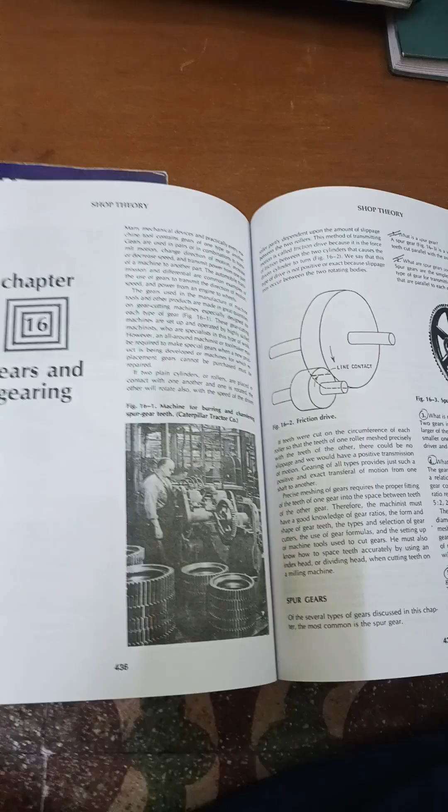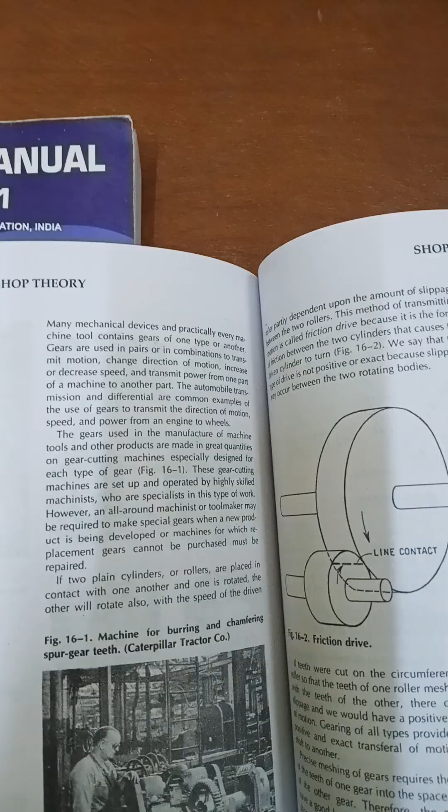Many mechanical devices and practically every machine's tools contain gears of one type or another. Gears are used in pairs or in combinations to transmit motions, change direction of motion, increase or decrease speed, and transmit power from one part of a machine to another part.

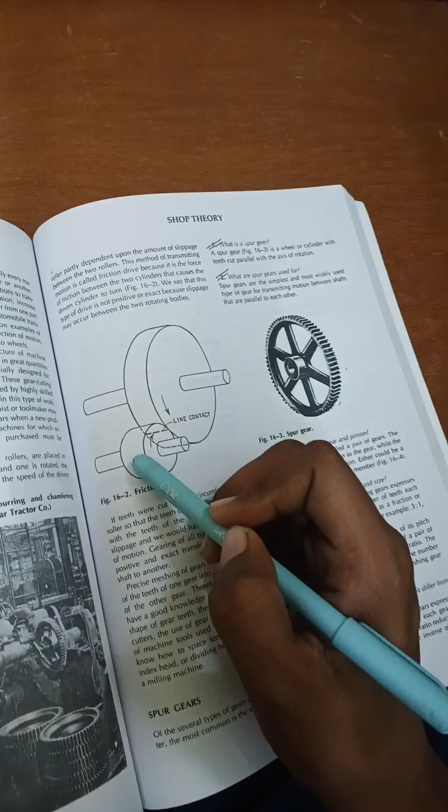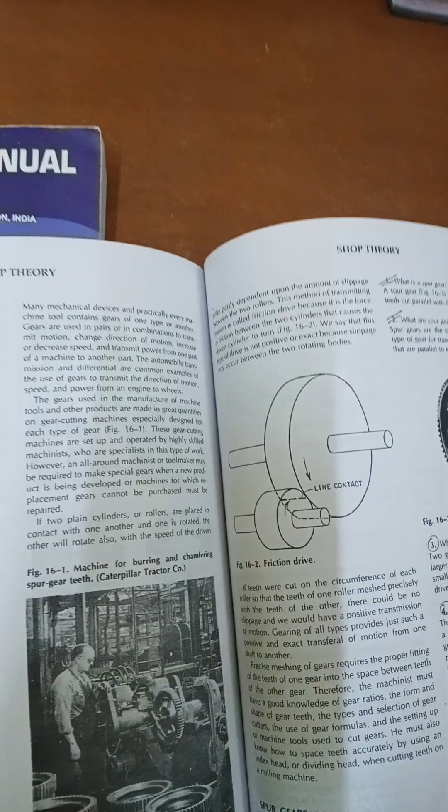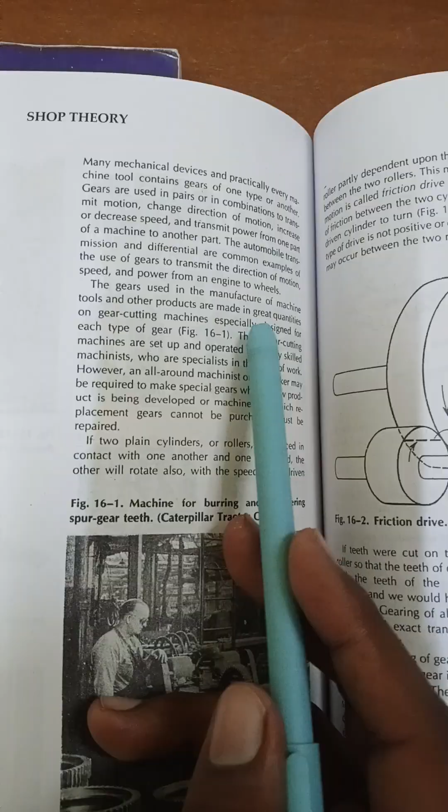The automobile transmissions and differential are common examples of the use of gear to transmit direction of motion, speed, and power from an engine to wheels. The gears used in the manufacture of machines, tools, and other products are made in great quantities on gear cutting machines specially designed for each type of gear. Figure 16-1, that is the gear.

These gear cutting machines are set up and operated by highly skilled machinists who are specialists in this type of work.

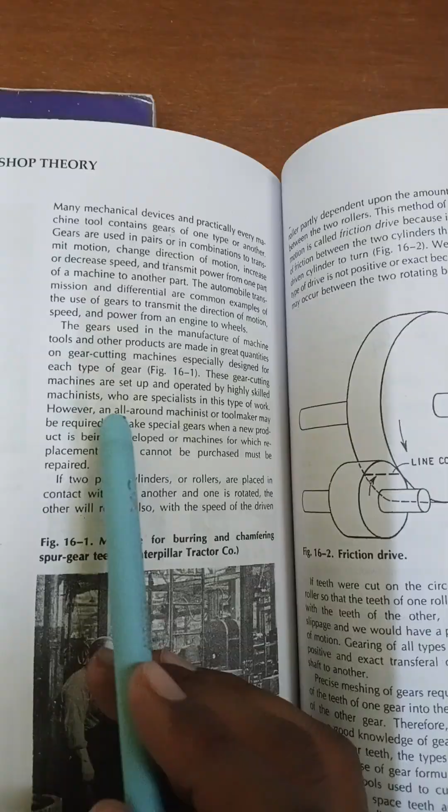However, an all-round machinist or tool maker may be required to make a special gear when a new product is being developed or machines for which replacement gear cannot be purchased must be repaired.

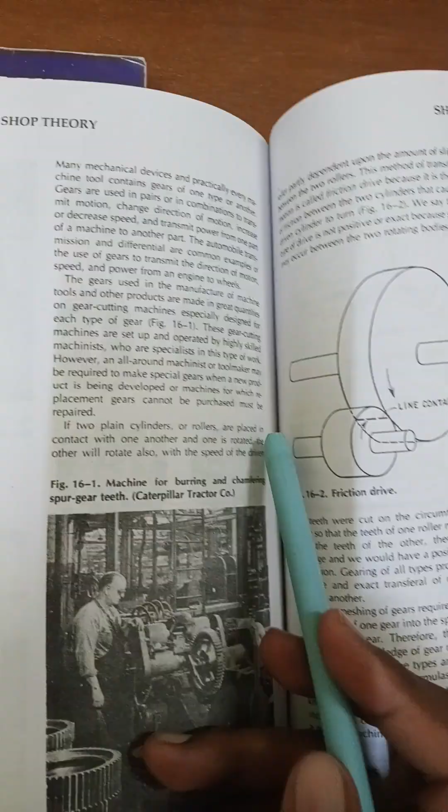Roller partly dependent upon the amount of slippage between the two rollers.

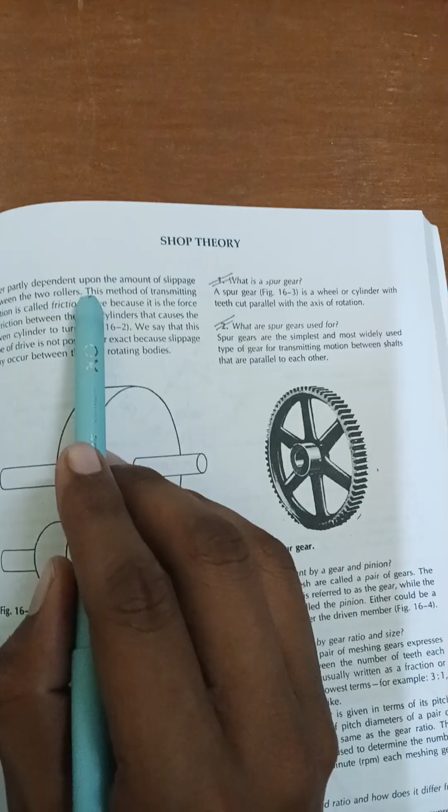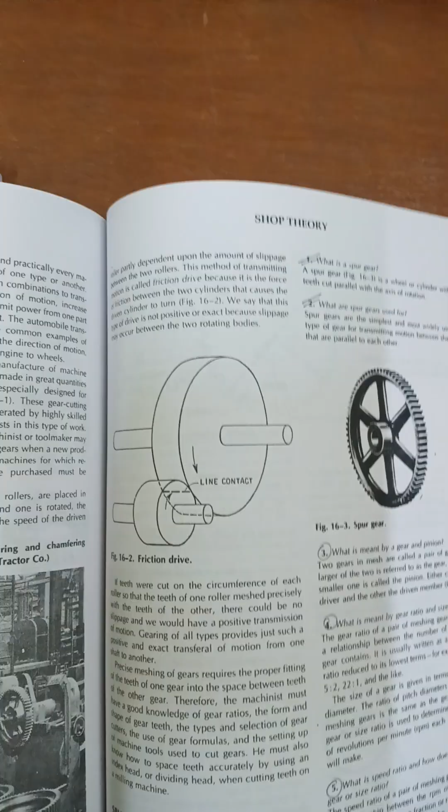Drive, because it is the force of friction between two cylinders that causes the driven cylinder to turn. 16.2. We say that this type of drive is not positive or exact because slippage may occur between the two rotating bodies.

The first in gears is the spur gear. What is spur gear? A spur gear is a wheel or cylinder with teeth cut parallel with the axis of rotation.

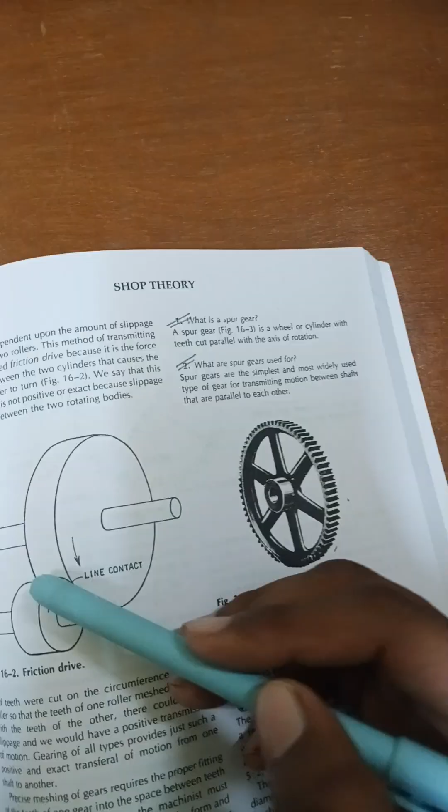What are spur gears used for? Spur gears are the simplest and most widely used type of gear for transmitting motion between shafts that are parallel to each other.

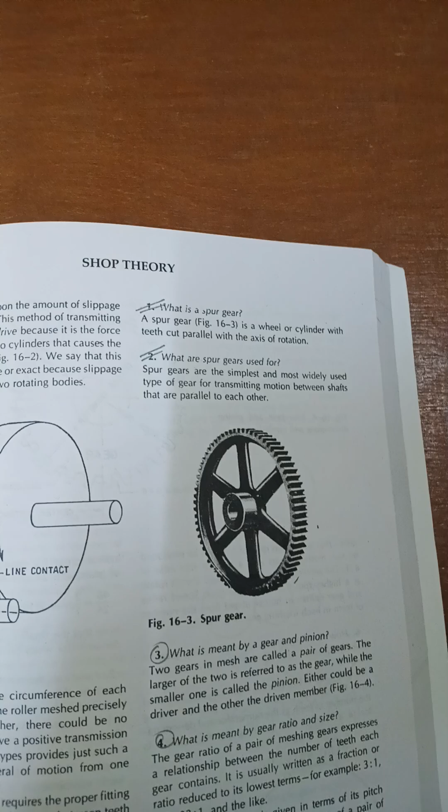In watches there is a different type as well, we will go ahead with that. What is meant by a gear and pinion? Two gears in mesh are called a pair of gears. The larger of the two is referred to as the gear, while the smaller one is called the pinion. One could be the driver and the other the driven member.

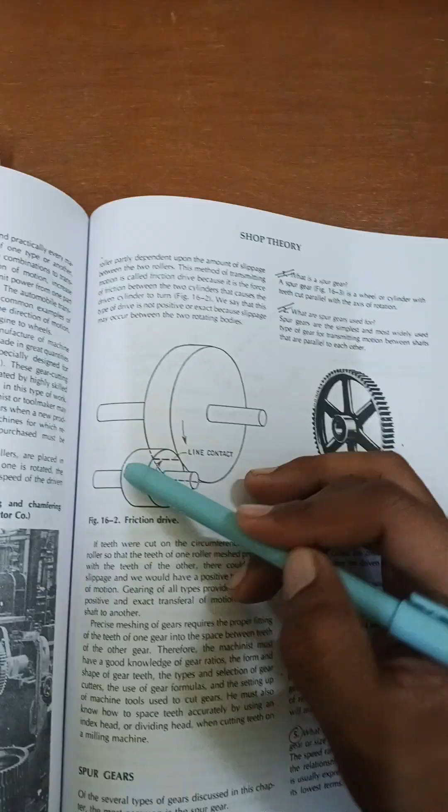What is meant by gear ratio and size? The gear ratio of a pair of meshing gears expresses a relationship between the number of teeth each gear contains. It is usually written as a fraction or ratio reduced to its lowest terms. For example, 3:1, 5:2, 22:1, and the like.

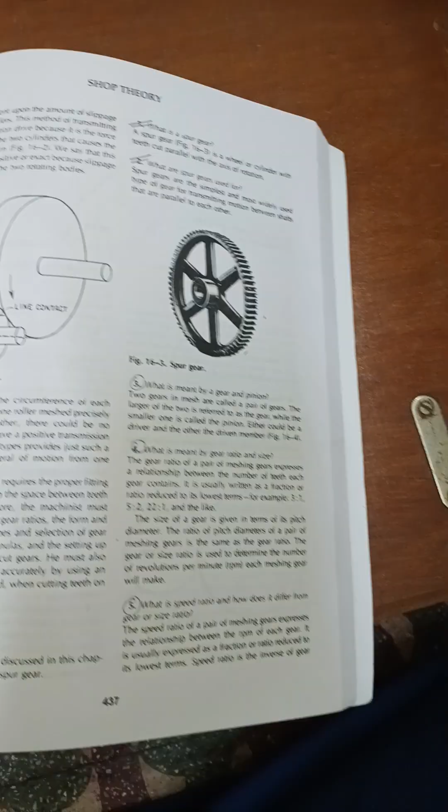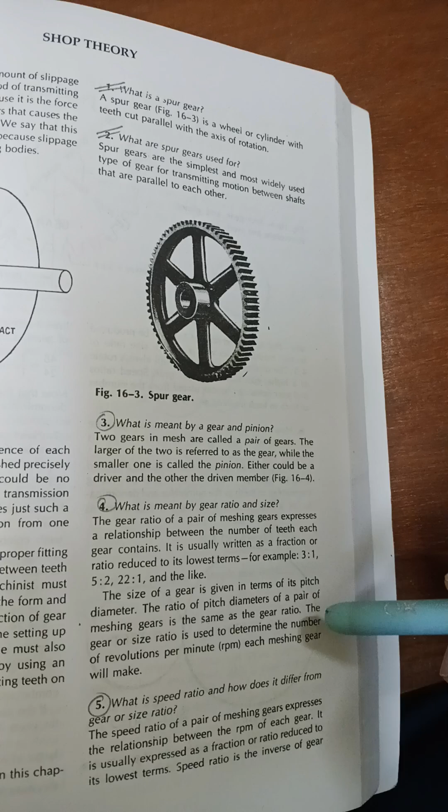The size of a gear is given in terms of its pitch diameter. The ratio of pitch diameters of a pair of meshing gears is the same as the gear ratio. The gear or size ratio is used to determine the number of revolutions per minute of each meshing gear.

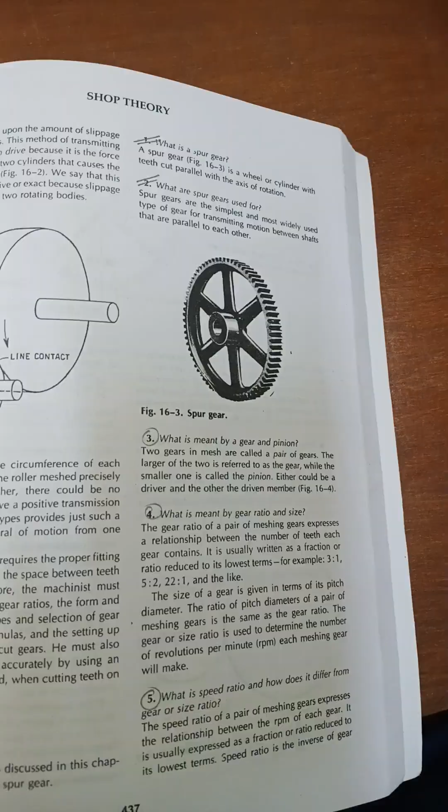What is speed ratio and how does it differ from gear or size ratio? The speed ratio of a pair of meshing gears expresses the relationship between the RPM of each gear.

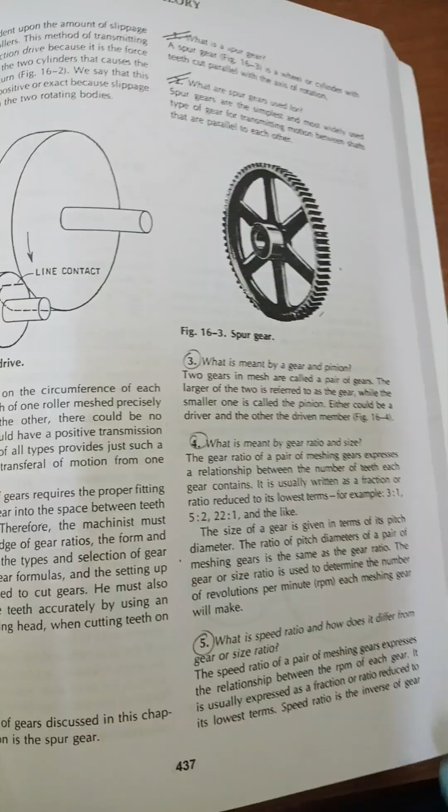इतना समझ लीजिए, the relationship between the RPM of each gear, it is called speed ratio. It is usually expressed as a fraction or ratio reduced to its lowest term. Speed ratio is inverse of gear ratio, that is the speed ratio of 1/4.

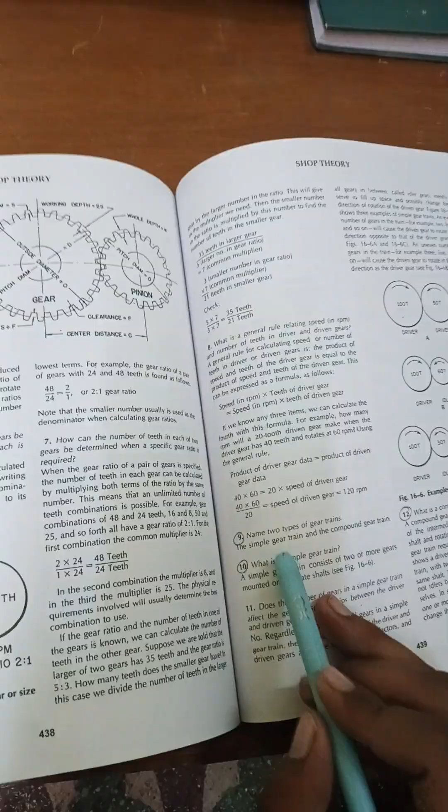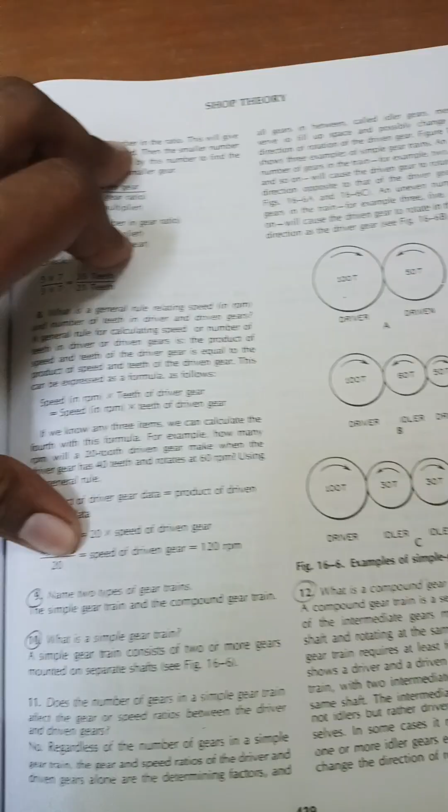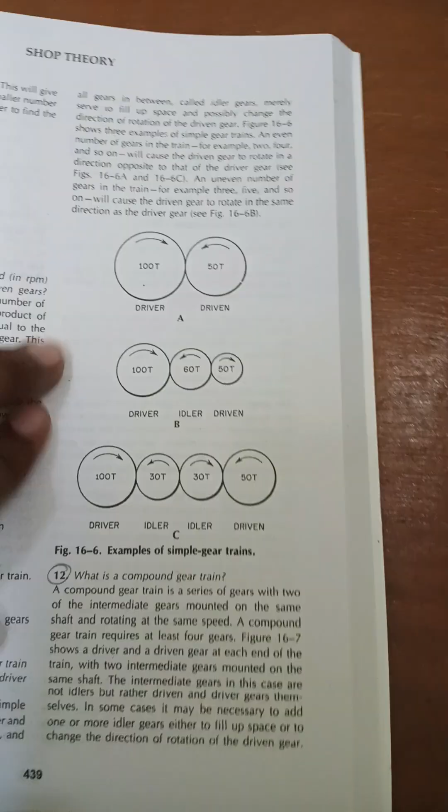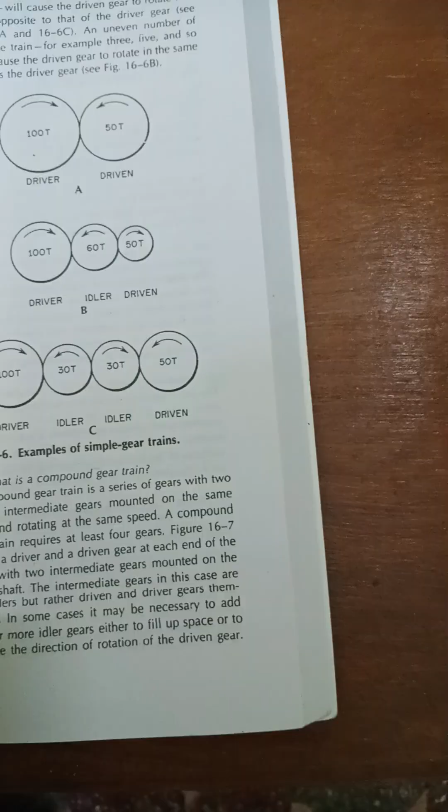What is a compound gear train? A compound gear train is a series of gears with 2 of the intermediate gears mounted on the same shaft and rotating at the same speed. A compound gear train requires at least 4 gears, a driven and driver gear at each end of the train with 2 intermediate gears mounted on the same shaft.

The intermediate gears in this case are not idlers but rather driven and driver gears themselves. In some cases, it may be necessary to add one or more idler gears either to fill up space or to change the direction of rotation of the driven gear.

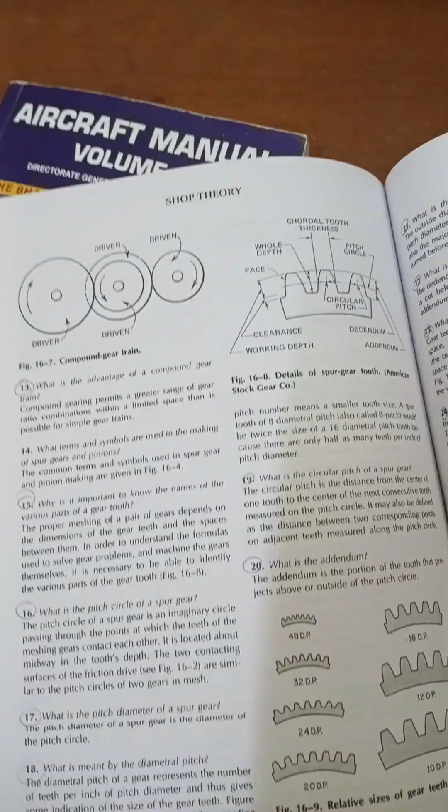Why is it important to know the names of the various parts of a gear tooth? The proper meshing of a pair of gears depends on the dimensions of the gear teeth and the space between them. In order to understand the formulas used to solve gear problems and machine the gears themselves, it is necessary to be able to identify the various parts of a gear tooth.

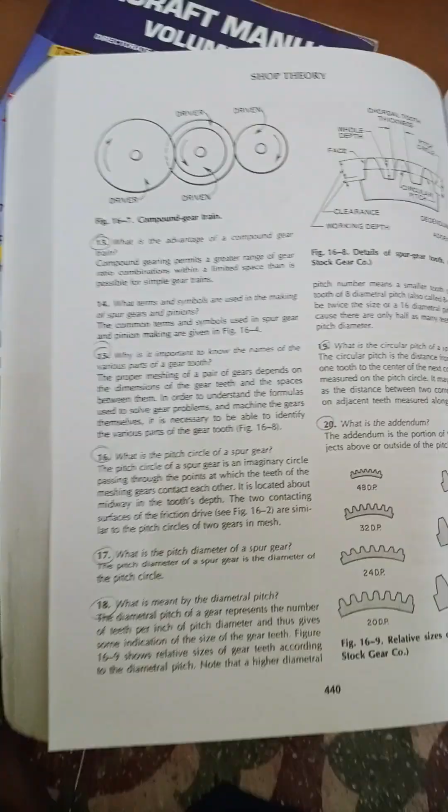What is the pitch circle of a spur gear? The pitch circle of a spur gear is an imaginary circle passing through the point at which the teeth of the meshing gears contact each other. What is the pitch diameter of a spur gear? Pitch diameter of a spur gear is the diameter of the pitch circle.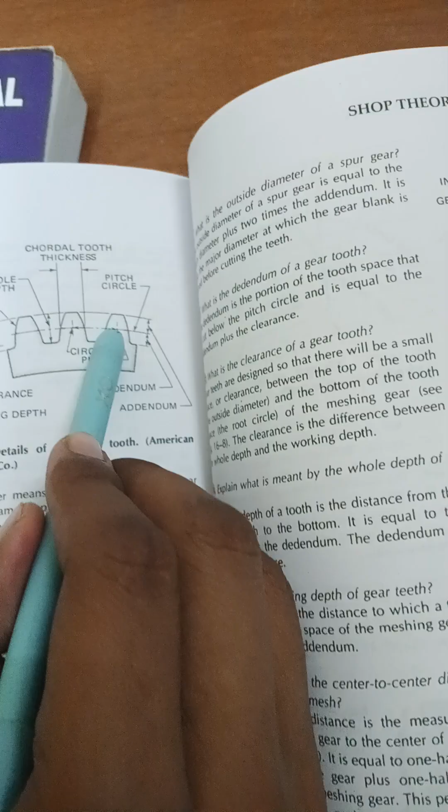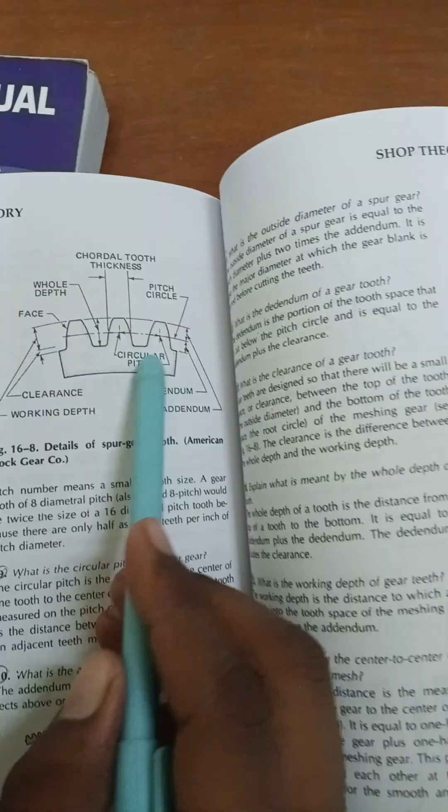What is meant by diametral pitch? The diametral pitch of a gear represents the number of teeth per inch of diameter.

What is the circular pitch of a spur gear? The circular pitch is the distance from the center of one tooth to the center of the next consecutive tooth, measured on the pitch circle.

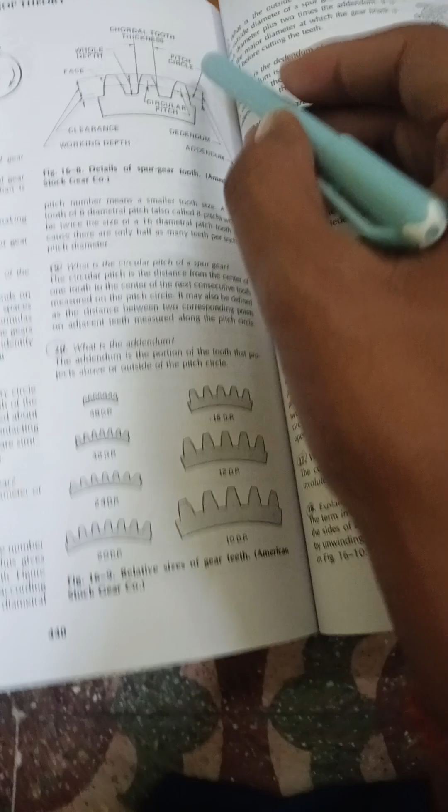What is the outside diameter of a spur gear? The outside diameter of a spur gear is equal to the pitch diameter plus 2 times the addendum. It is also the major diameter at which the gear blank is turned before cutting the teeth. What is dedendum of a gear?

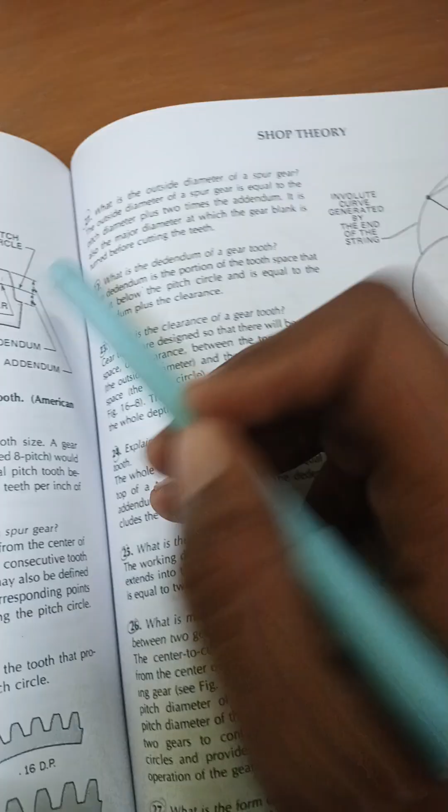What is the clearance of the gear tooth?

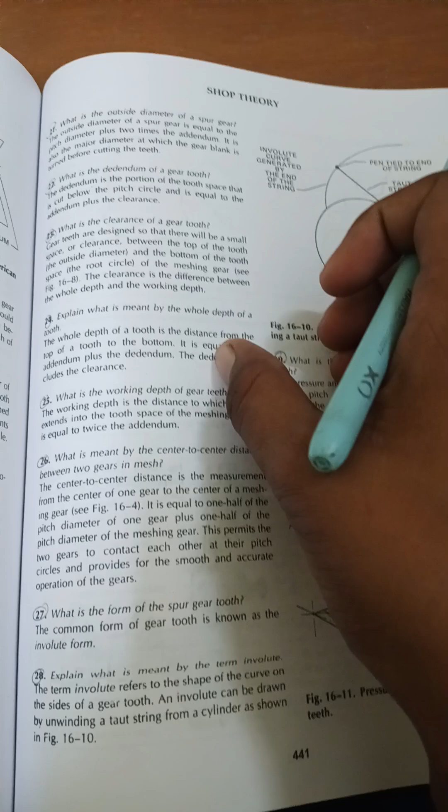The whole depth of a tooth is the distance from the top of the tooth to the bottom. It is equal to the addendum plus the dedendum. The dedendum includes the clearance.

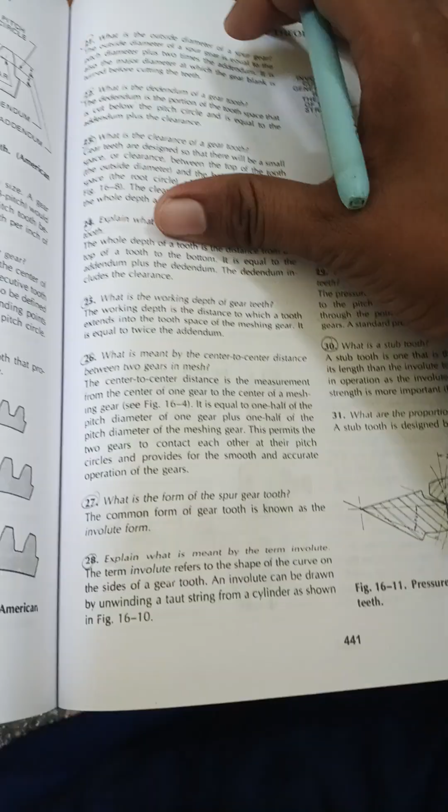Working depth. What is meant by the center to center distance between two gears in mesh? The center to center distance is the measurement from the center of one gear to the center of a meshing gear. It is equal to the half of the pitch diameter of gears.

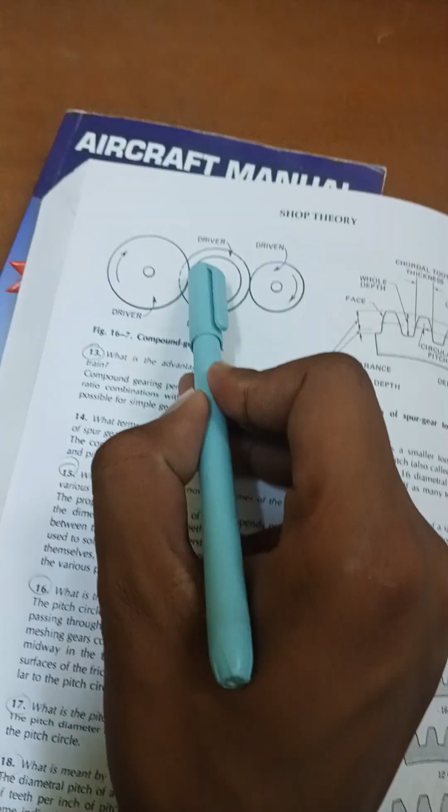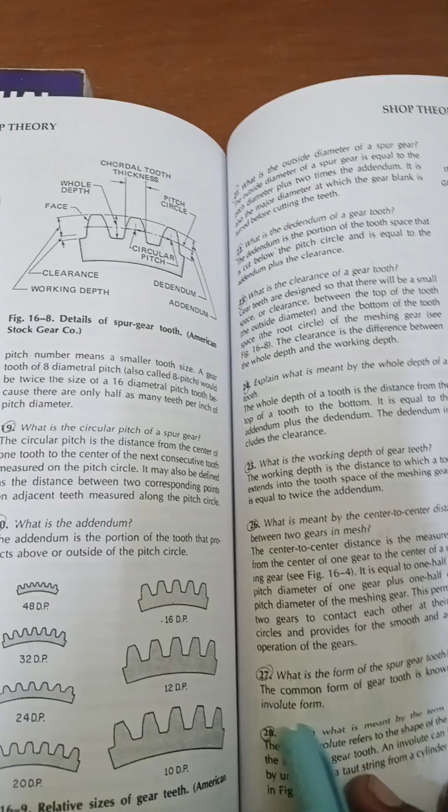Explain involute form. This involute curve is generated by the end of the string. Explain what is meant by the term involute. The term involute refers to the shape of the curves on the sides of a gear tooth. An involute can be drawn by unwinding a taut string from a cylinder.

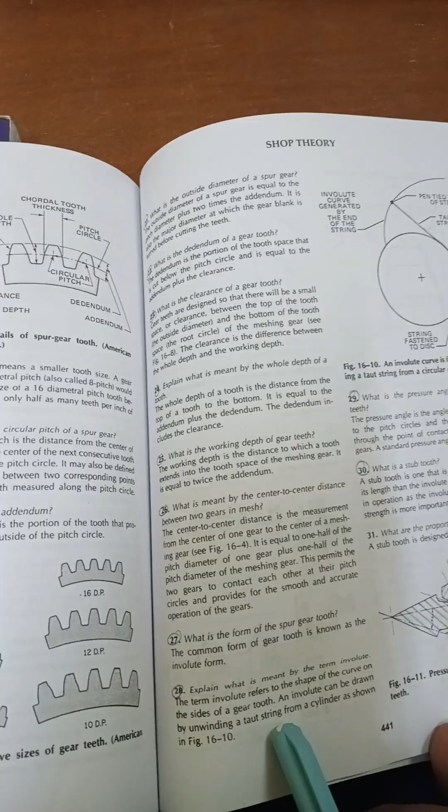What is the pressure angle of an involute gear tooth? The pressure angle is the angle between the tangent to the pitch circle and the perpendicular line through the point of contact of the two meshing gears. A standard pressure angle is 14 1/2.

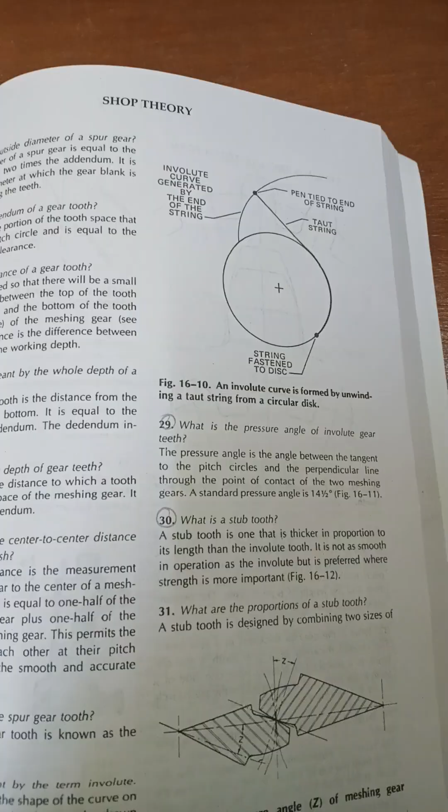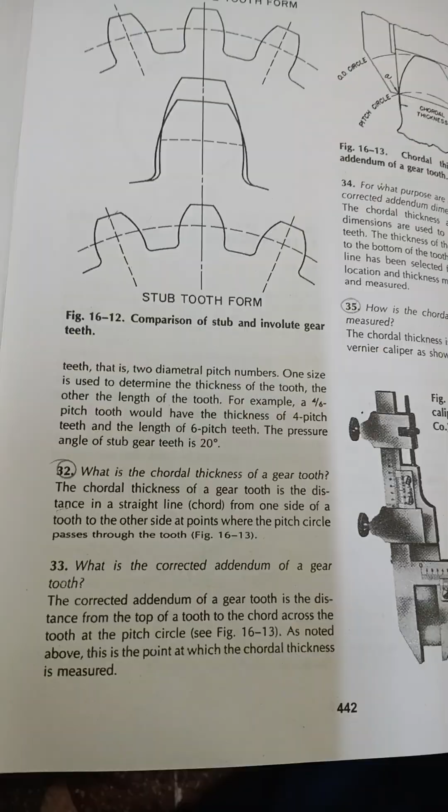It is not as smooth in operation as the involute, but is preferred where strength is more important. What is the chordal thickness of the gear tooth? The chordal thickness of a gear tooth is the distance in a straight line chord from one side of a tooth to the other side at the point where the pitch circle passes through the tooth.

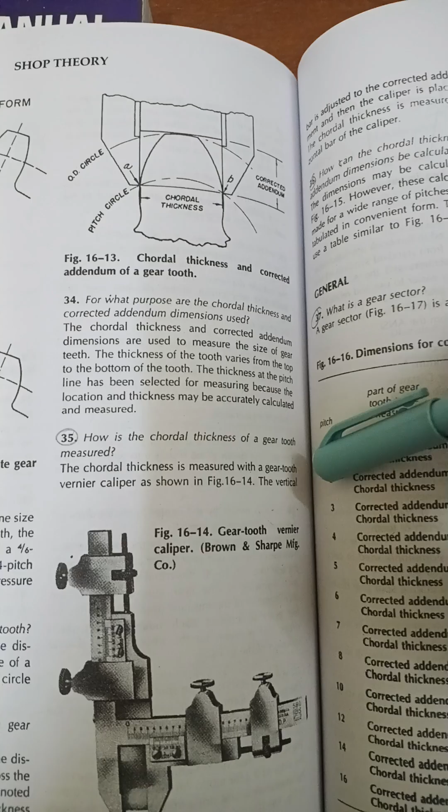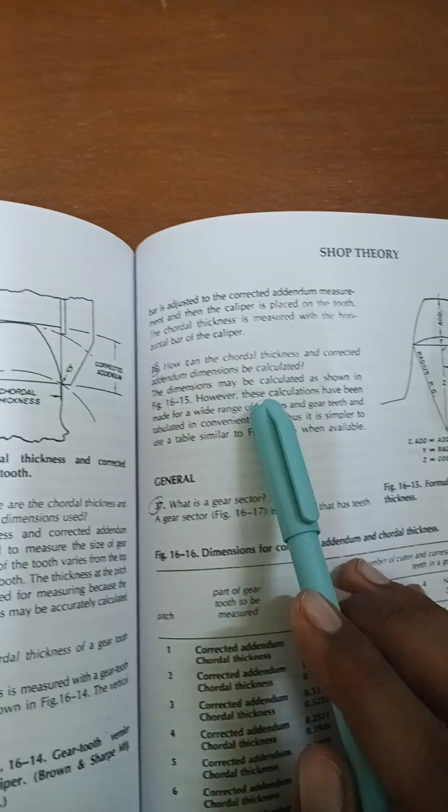How can the chordal thickness and corrected addendum dimension be calculated? Dimensions may be calculated as shown in figure 16-15. However, this calculation has been made for a wide range of gear teeth and tabulated in convenient forms. It is simpler to use a table similar to figure 16-16 when available. What is a gear sector? A gear sector is a wheel that has teeth.

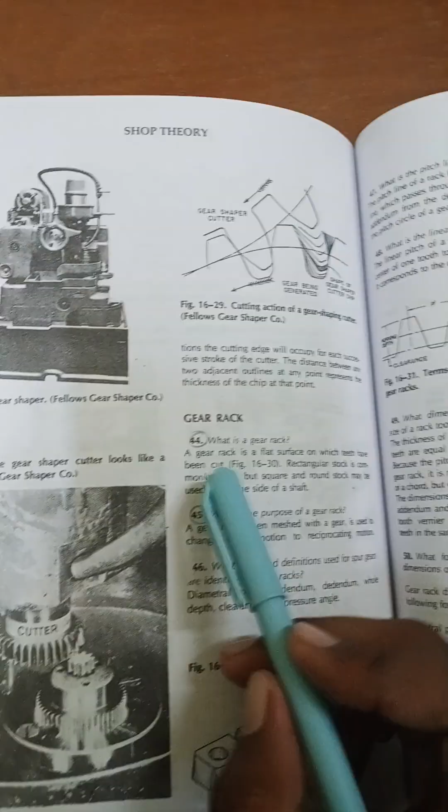A gear rack is a flat surface on which teeth have been cut. Rectangular stock is commonly used, but square and round stock may be used on the side of a shaft. That is a gear rack.

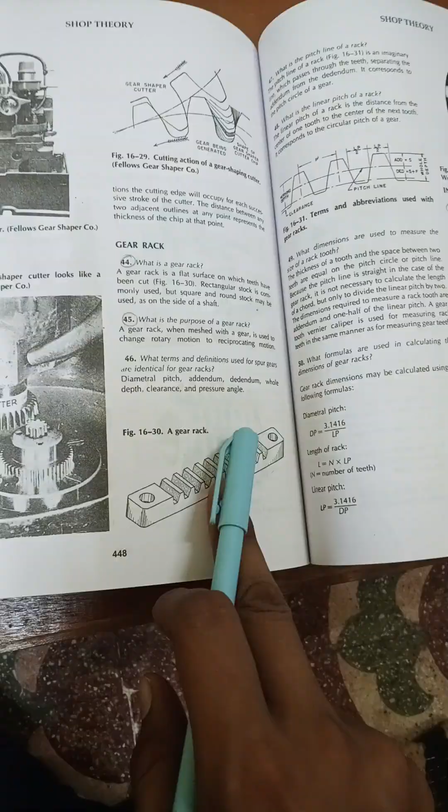What is the purpose of gear rack?

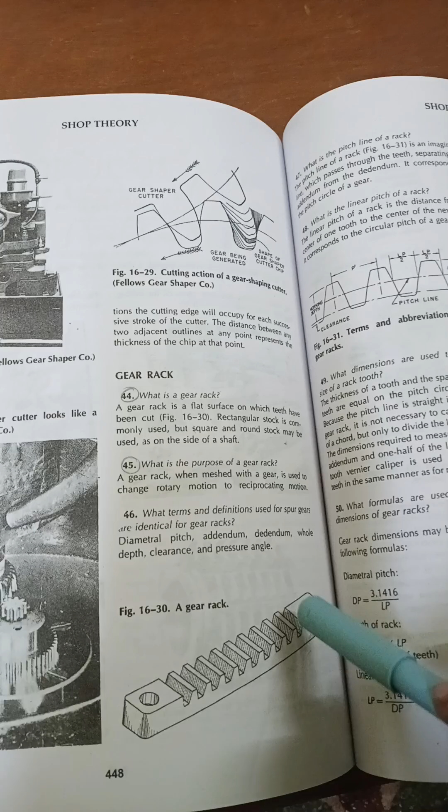Gear rack, when meshed with a gear, is used to change rotary motion to reciprocating motion.

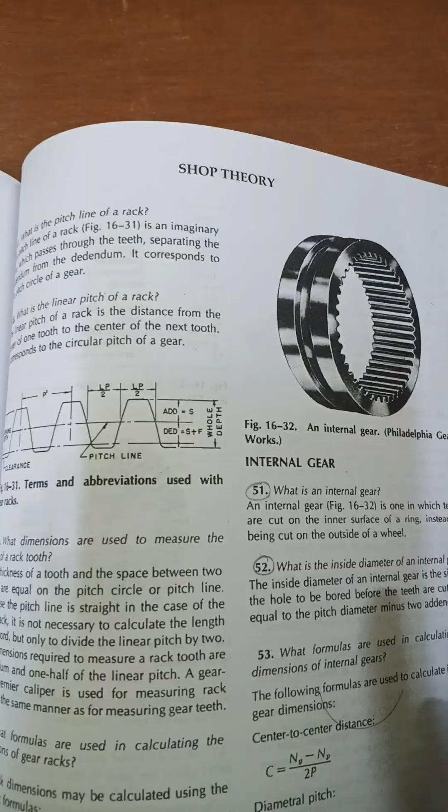What is an internal gear? An internal gear is one in which teeth are cut on the inner surface of a ring instead of being cut on the outside of the wheel, like an internal thread. That is called an internal gear, which is ring-shaped.

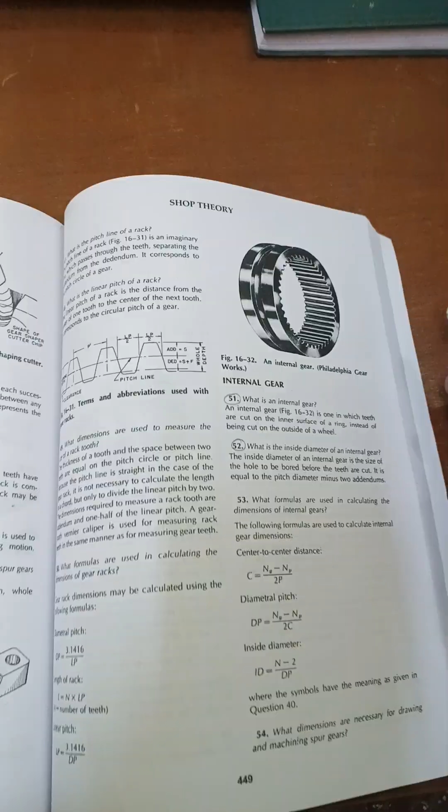What is the inside diameter of an internal gear? The inside diameter of an internal gear is the size of the hole of the blank before the teeth are cut. It is measured from the center before the teeth are cut, and that is the inside diameter. It is equal to the pitch diameter minus 2 addendum.

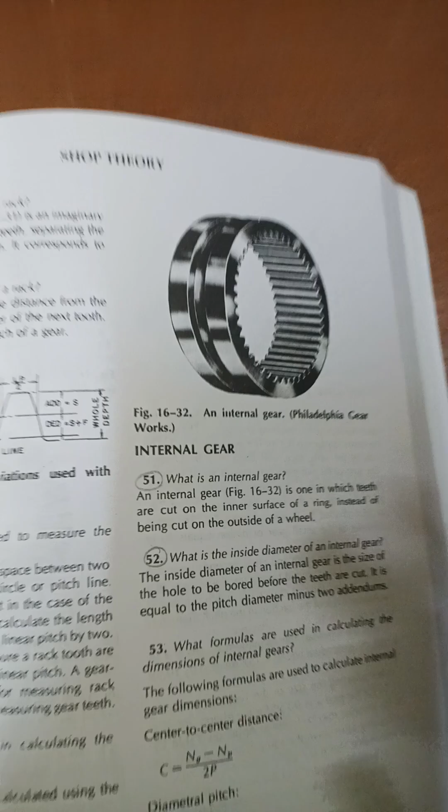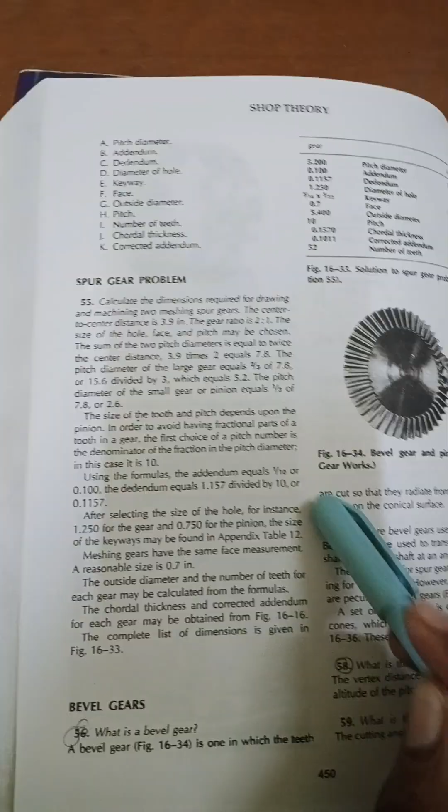What is a bevel gear? A bevel gear is one in which the teeth are cut so that they radiate from the apex of a cone and lie on the conical surface. This gear is not straight from the center, it goes slightly above center, meaning it goes in a slightly different axis, an upper surface axis. It looks straight but it actually lies on an upper axis.

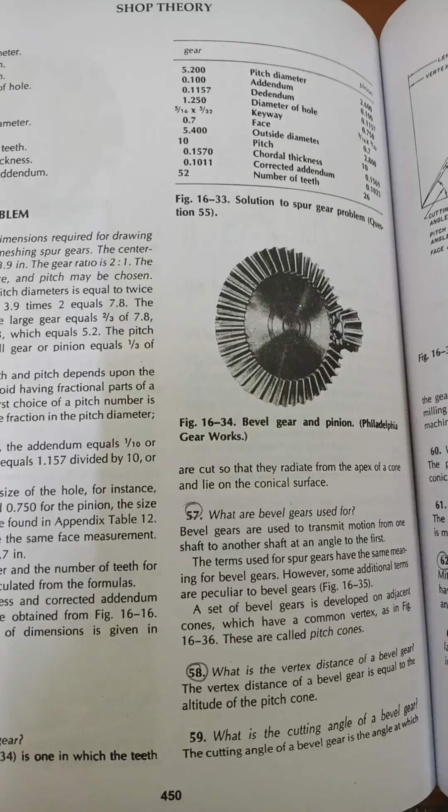What are bevel gears used for? Bevel gears are used to transmit motion from one shaft to another shaft at an angle to the first. This is used to transmit motion from one shaft to another shaft at an angle.

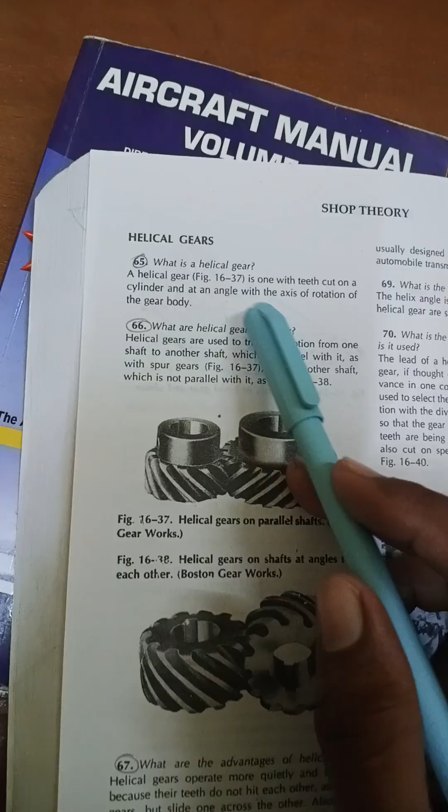What are the advantages of a helical gear? What is a helical gear? A helical gear is one with teeth cut on a cylinder at an angle with the axis of rotation of the gear body.

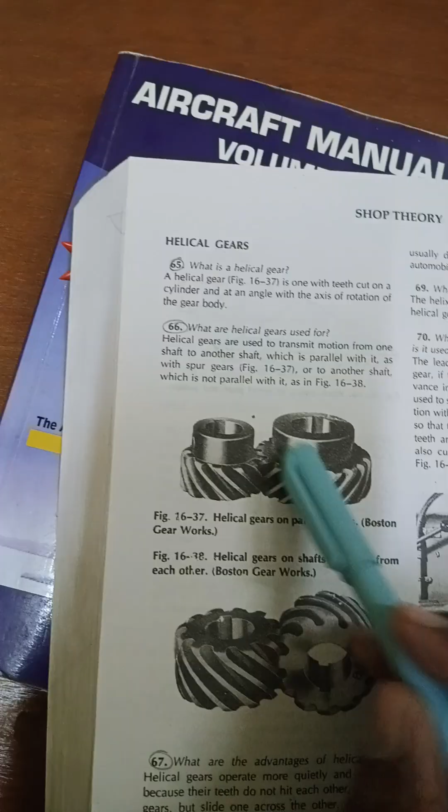What are helical gears used for? Helical gears are used to transmit motion. The upper surface is slightly raised, and this is the lower gear. Helical gears are used to transmit motion from one shaft to another shaft which is parallel with it, or to another shaft which is not parallel with it.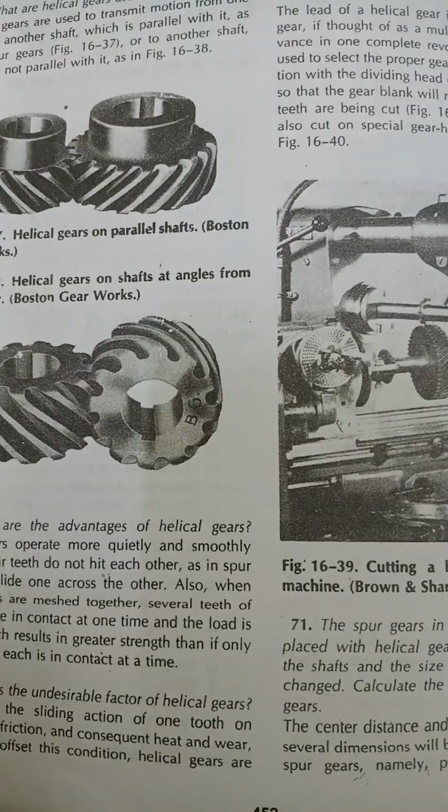What are the advantages of helical gears? Helical gears operate more quietly and smoothly because their teeth do not hit each other as in spur gears, but slide one across the other. Also, when helical gears are meshed together, several teeth of each gear are in contact at one time, and the load is spread, which results in greater strength than if only one tooth is in contact at a time.

What is a herringbone gear? Originally, a herringbone gear consisted of two helical gears of equal size but of opposite hand joined together. Today, most herringbone gears are produced as a single unit on a special machine which cuts the teeth in two directions at the same time.

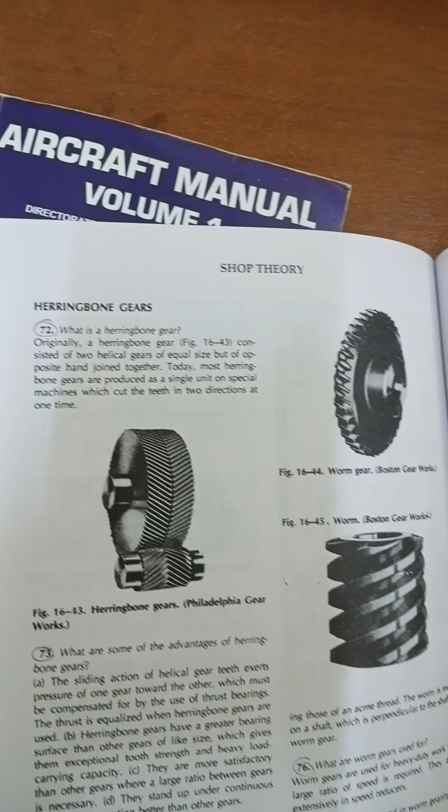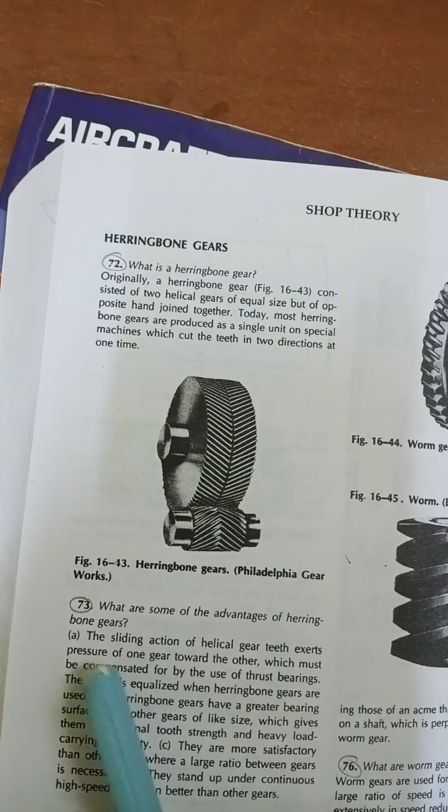What are some of the advantages of herringbone gears? A sliding action of helical gear teeth exerts pressure of one gear toward the other, which must be compensated by the use of thrust bearings. The thrust is equalized when herringbone gears are used. Herringbone gears have a greater bearing surface than other gears of like size, which gives exceptional tooth strength and heavy load carrying capacity.

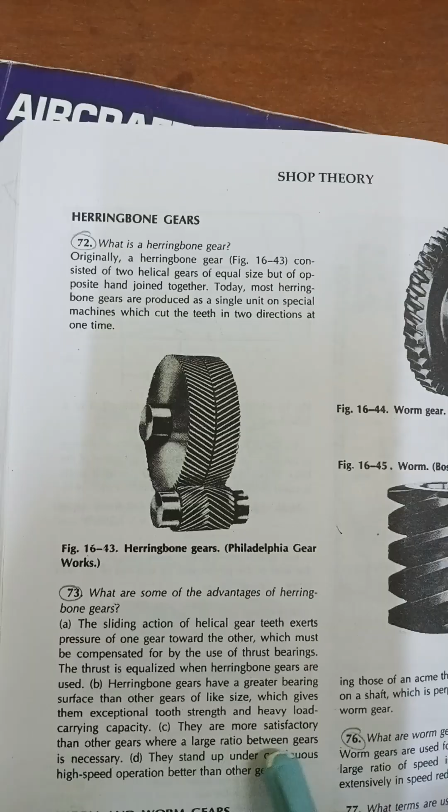They are more satisfactory than other gears where a large ratio between gears is necessary. They stand up under continuous high-speed operation better than other gears.

Worm gear. A worm gear is a wheel having teeth cut angular with the axis of rotation and radially on the gear face. That is a worm gear, of this type.

What is a worm? A worm is a cylinder with teeth resembling those of an acme thread. The worm is mounted on a shaft which is perpendicular to the shaft of the worm gear.

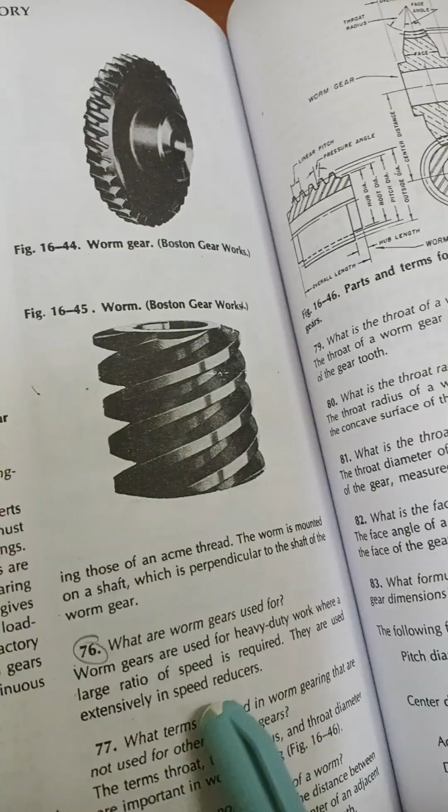What is a worm gear used for? Worm gears are used for heavy duty work where a large ratio of speed is required. They are used extensively in speed reducers. Thank you.